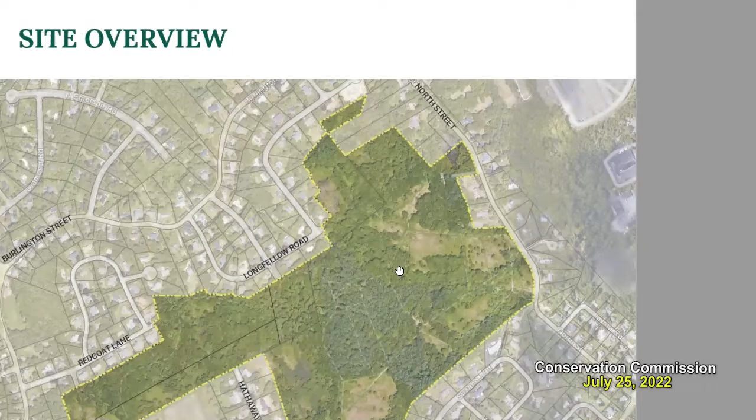So just so everyone knows where we are, Willards Woods is the 107-acre largest conservation area under Lexington's control. We have North Street, the entrance at that location up on the upper right, and then Brent Road at the bottom of the page, and also Hathaway Road, which we'll also be talking about, in the middle bottom left. Just so folks are oriented, that is the site.

To go over the project scope, essentially what Kyle Zick Landscape Architecture has been charged with is coming up with a design plan for a universal access trail or trails, and parking accommodations with that.

So what we've started examining and will continue over the next several months: the proposed trail route or routes we are looking at, infrastructure improvements such as trail improvements in terms of site furnishings, signage, kiosks, and that sort of thing. We'll also be looking at and providing suggestions on invasive species management along the trail route, although not for the entire Willard Woods itself.

We're going to look at sustainability, both in terms of material choice and longevity, but also ease of maintenance. We'll look at parking options for the improved trails, and also develop cost estimates so there can be budgeting and planning moving forward for construction. The project also includes delineating the wetlands along the trail routes we've been looking at, and completing a complete land survey of the entire property, which is ongoing right now and should be wrapping up in the next week or so.

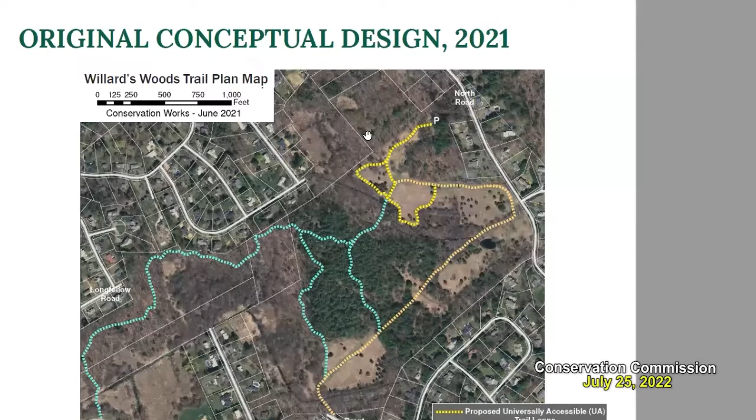Right now we're looking at a number of conceptual designs exploring different lengths of trail and different start and end points. On this map, essentially, we keep the restoration and improved entry drive and parking area at North Street consistent throughout all of them, since we feel that's an important element that should be included in all of the concepts.

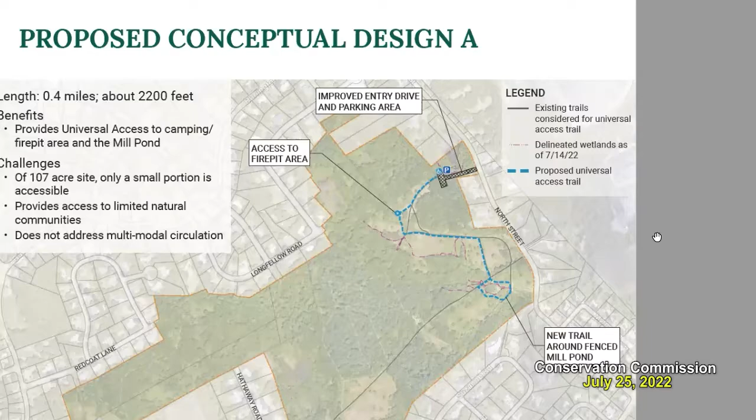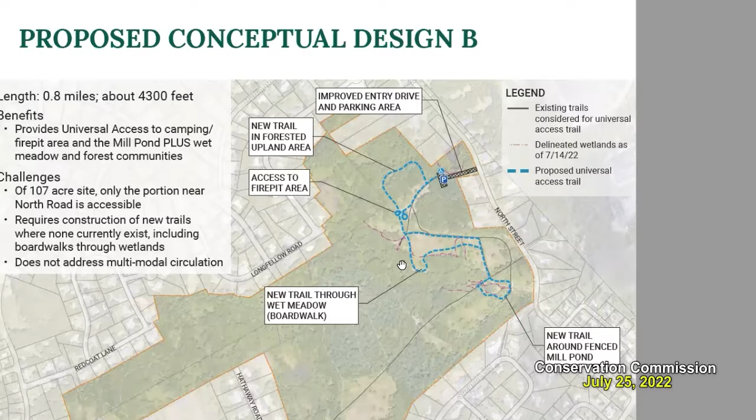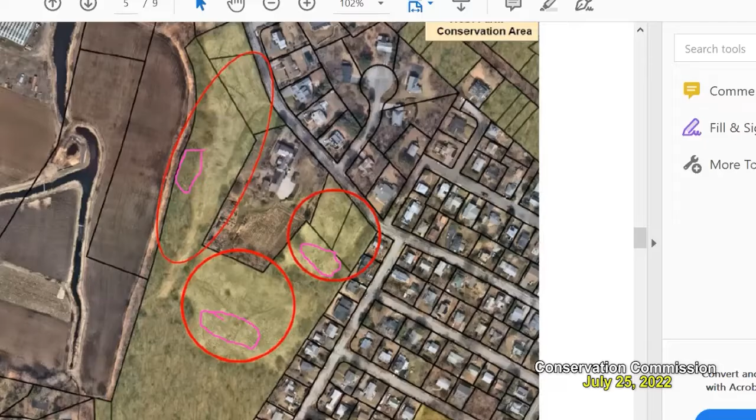Okay, does that give you the direction you need, Amber? Yes, at this time. I can always come back if I have future questions, if management doesn't turn out the way I hoped, but that puts me in the right direction. Thank you.

Now let's move on to the next item, discussion on the draft policy for memorials on conservation land. We get a lot of requests to put in memorial benches, and I found something my predecessor pulled together in 2016. I wanted to revisit that so I can provide more structured guidance on what the commission wants to see. Currently, you've approved various stone benches, no wooden benches, no metal benches. We get a lot of requests lately, about 5 different people asking about a memorial bench at the moment. The select board has an official policy in place that people are familiar with, so they're expecting something similar from the Conservation Commission.

I read through it and didn't have any comments, I thought it looked pretty complete. It gave some specific direction but also gave the commission some flexibility. I was happy with the language. I don't know if the other commissioners had a chance to review it and if they had any comments or concerns.

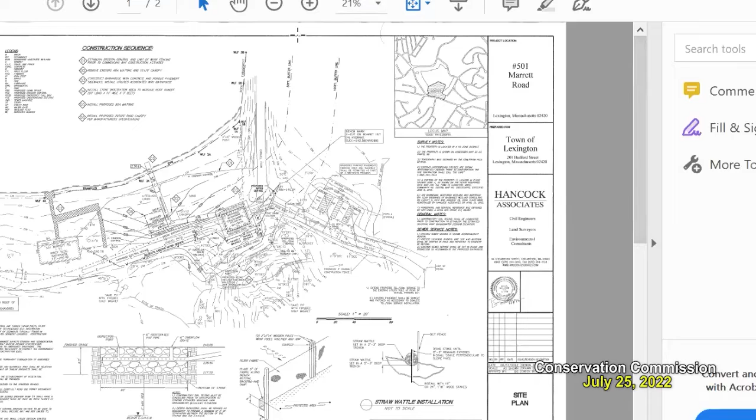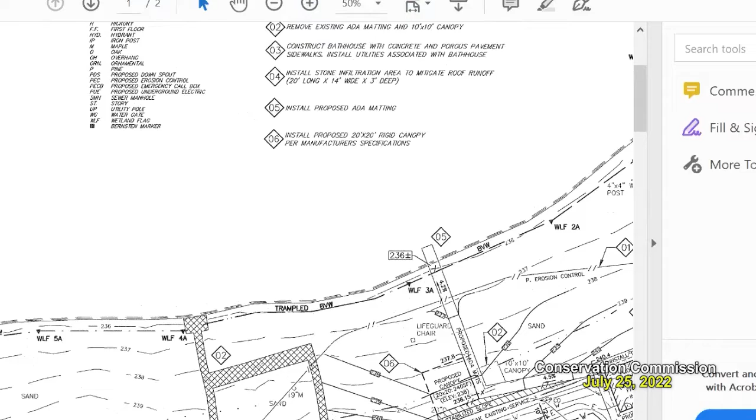Good evening. For the record, Brian Gaudreau with Hancock Associates. I'm here on behalf of the town DPW for the bathhouse improvements at the reservoir. Pretty small scope. What is proposed is a 20 by 26 precast concrete structure to be placed essentially where the gravel driveway is right now, at the fencing line that surrounds the reservoir and the beach.

As part of this bathhouse improvement, there's going to be a new ADA pathway and ADA matting, which is essentially a pervious kind of carpet, to be laid down to the beach and into the water. If you look at the plan, there's a little bit of contouring, limited to regrading the sand heading down to the water to maintain an ADA accessible slope.

There are maximum and minimum slopes we have to adhere to per regulations, and that's what we're showing. There's a small dashed rectangle off to the left of the pathway to the water, and that's going to be a canopy. There's an existing canopy with 4 posts and a canvas cloth. It's going to be substantially similar, just a little bit bigger.

Additionally, there's going to be some utility work outside the fencing line. There's a water line and a sewer line that run from the existing building down towards the school, which will be relocated and connected to the new bathhouse building. Stormwater management has been fully designed to take the roof runoff and the walkway surrounding the building and attenuate and infiltrate it into the ground. There's a small crushed stone infiltration area earmarked southwest of the proposed building.

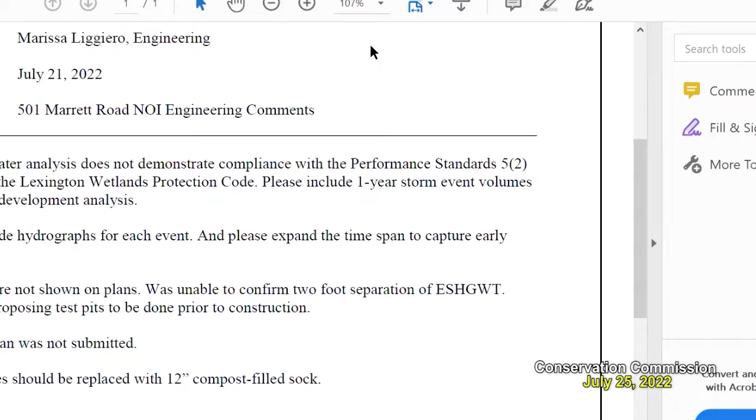There is a geotechnical engineer on board with the project. Borings need to be conducted for part of the foundation engineering before this goes out to bid, and we're anticipating piggybacking on that geotechnical investigation to dig a hole in the ground adjacent to the building, where we're proposing the infiltration structure, to confirm that groundwater elevation. So we'd just look for that to be conditioned. I know it's a small scope project and that was a high-level review, but I'm happy to answer any questions.

Any members of the commission have comments or questions? Jason? Yeah, so I think one question we had at the site visit is how the path is going to wrap around the bathhouse. I guess it would be in the downward direction. I don't know where north is on this figure, but on the bottom of the page, it wraps around the bathhouse. Let me see if I can annotate this real quick. Where the water line is, is that where the path goes?

So the water line is down here, and the fence, if we're talking about the fence, is currently right there. Essentially, the bathhouse sits at the face of the fencing that's there. The walkway that goes around is going to have two gates on either side. So the fence ties into the building in those locations to secure the beach as it is right now.

No, I'm talking about the path to walk around it. So if you're walking around the area, does that path extend that way? Yes, it does.

And so because of that path, is that why we have to take down those trees on that slope? I see two trees to be removed. It's going to be a combination of the pathway and the utilities that are out there. Right now we have sewer, water, and electric that physically go underneath this footprint, and we need to relocate those to the south side of the structure. So it's going to be a combination of the pathway and utility work.

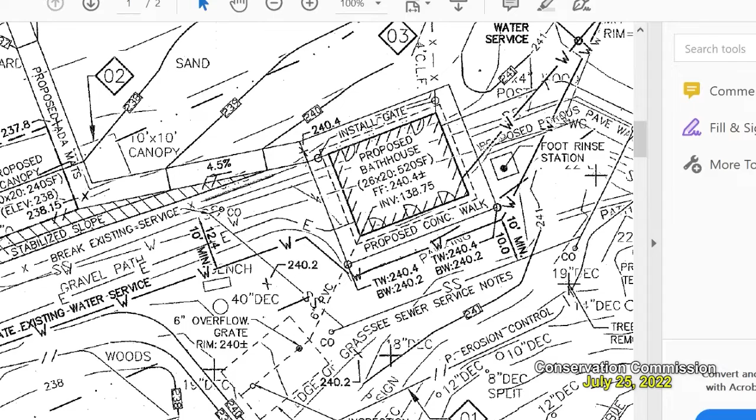Okay. So then with the stormwater system, can we zoom out a little bit? And then pan to the right where the parking, the proposed—not proposed parking, but potential future parking—is shown on the plans.

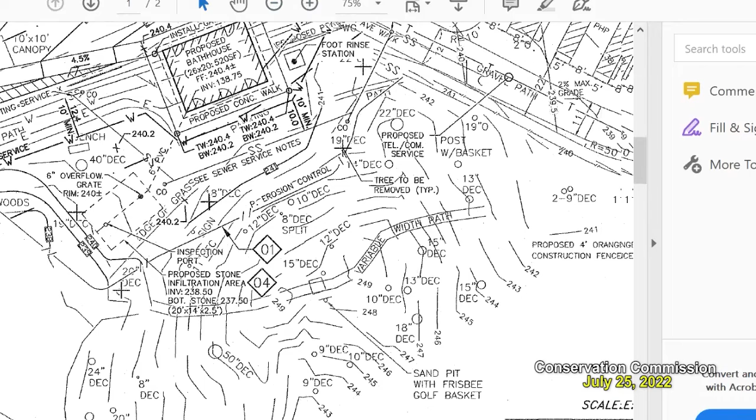Would it be possible to relocate the infiltration chambers to that area where the parking might go in the future? Because then the storm line and all these utility lines, my preference would be for them to stay within this kind of wide pathway corridor. So is it possible to locate it there? It looks like elevation-wise it's pretty comparable to where you have it. Could we locate it over in that area? Because it looks like there's only one small tree that would be disturbed in that area. Is that something you took a look at?

Absolutely. So in revising for what we just talked about, we will certainly look at that as well. Okay.

Then for the water line, I noticed that we've got a new water line to the existing building that's out there. Is that because it needs a new water line, or is that because the proposed bathhouse was going to interrupt that?

So we're not entirely sure what that water line looks like. We have it kind of sketched on there. It's our understanding that we're going to tap into water service at the manhole, then tie into the existing water service wherever we can cut it. So we're showing it happening schematically, but whether it happens next to the existing building or much closer to the proposed bathhouse, we won't know until we dig.

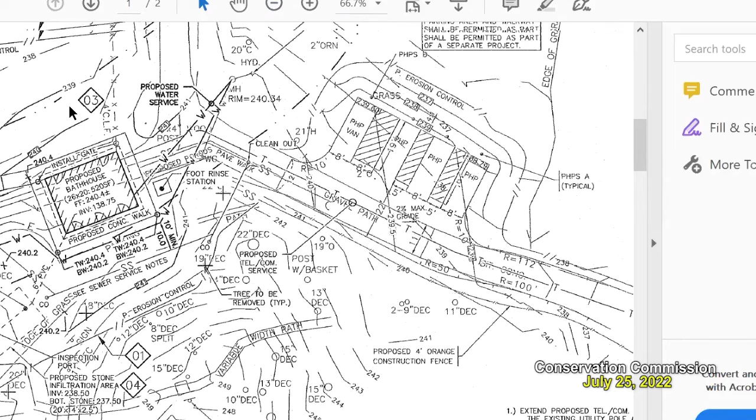I don't know the implications on the accessible route to the beach, but that's something that could be looked at. Yeah, so that's exactly it. If you look at the beach right now, you've got about 5 to 6 feet of topography—elevation change from that gravel path down to the waterway.

So if we take the proposed bathhouse from its current location, which is relatively flat because it's in the graveled area, and shift it to the beach proper, we're now having 3+ feet of elevation from the front of the bathhouse to the back of the bathhouse. So then carrying that grade change down to the water and providing the accessible route, it just didn't work, which is why we took a step back to figure out a more suitable location that still meets the intent and goal of the bathhouse to service beachgoers.

So what I can do to hopefully assuage your concern is take a harder look at those utilities and see if we can't tighten up those limits of disturbance, of trenching, to save as much as possible. And we'll look at the location and how they're running south around the building to see if that is in fact the best fit.

Did you look at a more diagonal alignment for those mats going to the water? Would that get you a longer run? It might need to enter the water more perpendicular to the water line at the very end, but can you work with the existing contours by going diagonally, keeping it under 5, or do it in a way where there's less need to massage those contours? Maybe you even have a path with a handrail next to the bathhouse to drop a foot or so.

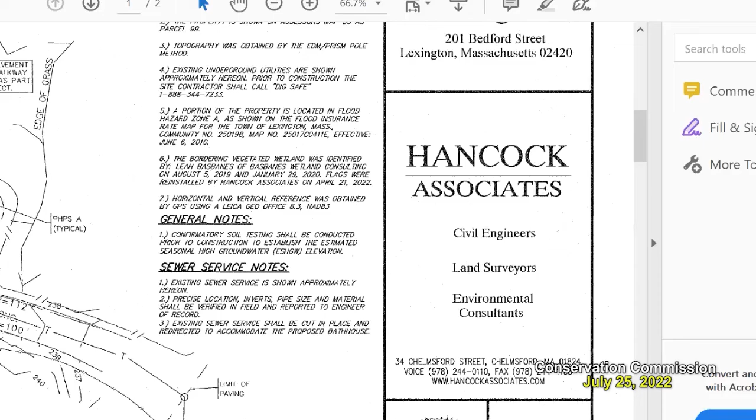That was my question too, just to piggyback on that. So they would come from the school down the gravel path. From the school, they would be okay—bathhouse, yep. There's a physical cart path that goes from the school parking lot up to the reservoir, yep.

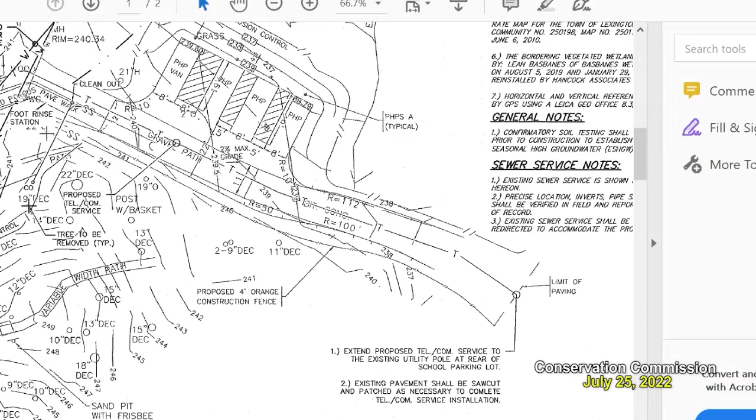Okay, and I'm sorry if I missed this—I was unable to get to the site visit, I was out of town—but is there a plan for an eventual removal of the old bathhouse? It's up in the air.

DPW doesn't know or doesn't have the funding to fully understand what's happening to the existing brick building right now. I believe there were pumps and aerators located in there that they're looking to maintain for the time being.

It's not being proposed to be demolished as a part of this application, but the thought is they're still trying to decide what to do. Okay, thank you.

Mike Cronin, I see your hands up. Good evening, everyone. So let me see if I can help out here a little bit, Kevin. We looked at this for about the last two years, and Marissa's on the call here someplace. It might even be three.

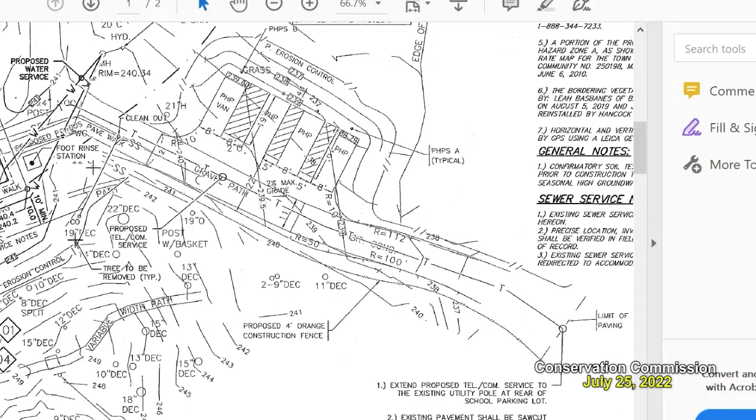So let's go back. We had this whole bathhouse inside the fence in that back corner, and we really wanted it to be there because it made the most sense for it to be inside there. We didn't have to change a whole lot of the fencing or a lot of the pathways. Your argument about relocating that was spot on.

We couldn't do it. We had an accessibility challenge. The building sat up too high on one end and too low on the other, and we couldn't make it an accessible pathway around the building. So we started pushing it back into that corner, and we moved it left, we moved it right. This was the one spot where we did the least amount of damage to all the different components, plus allowed the accessibility piece to happen.

Let me talk a little bit about the tree that you're concerned about inside the fence. We're not touching that tree no matter what. If we have to move that covered structure a little more to the right, closer to the water, we will do that. We're not interested in damaging that tree one bit. On paper it looks like one thing; in the field, we'll locate it accordingly so it doesn't impact the tree. That's not a question—we talked about that the day we were there last week.

I love your idea about potentially moving the system underneath the parking, the new parking spots we're locating on the right side as you enter up from the bridge. That's a great idea. I'm texting right now on the side—I think looking into that solution is a pretty good one. We'll take a look at that as early as tomorrow. I think that's a really good solution. It also eliminates the ability of touching any of those smaller trees down there.

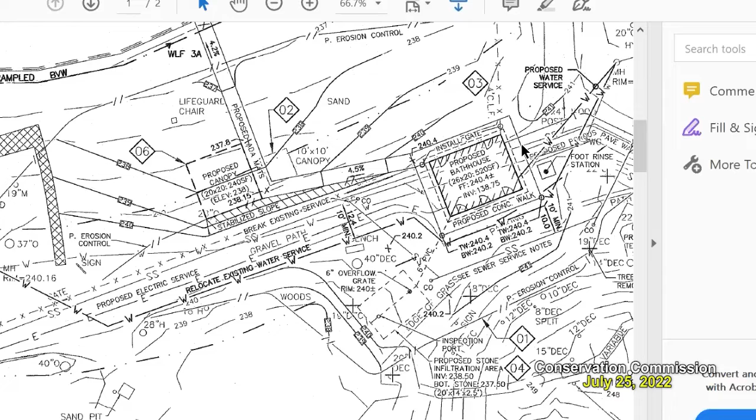Okay, any other comments from the commissioners? Do we have anybody with their hands raised from the public, Karen? No?

Okay, so Mr. Goudreau, I'm assuming you'd like to request a continuance to the next hearing. When is the next hearing? It's August 8th, so you can take a look at the stormwater and maybe some of these other items. Is that your preference? Okay.

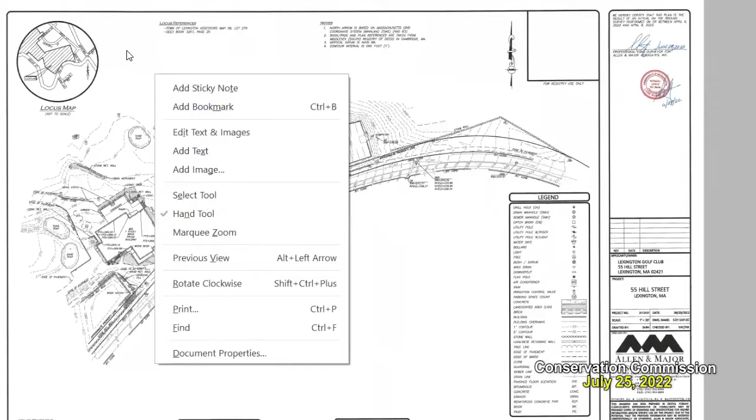So I'll skip past the existing conditions because I was able to display that on the aerial. Essentially what we're doing is, again, they're going to raze the existing golf clubhouse and construct it on the existing foundation, and then add about a 500 square foot addition onto the clubhouse, which will contain a set of stairs and an elevator. As a result, the ADA accessibility parking spots need to conform to the cross slopes.

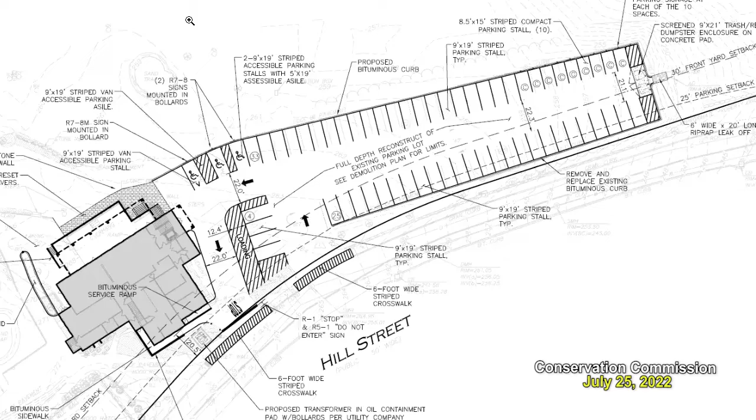So we have to kind of pick up this edge of the parking lot. What we propose to do is full depth reconstruction through the parking lot - it's at the end of its useful life. Then restripe the parking lot back to what's required under the zoning bylaws as far as drive aisle widths and parking stall spacing. We went through the design review, and it was requested that we incorporate a loading area up in front. We're also maintaining the existing curb cuts that are out there today.

Outside of those, that's really the only improvements taking place on the site. Let me scroll down here. So again, these parking spaces need to be regraded. We're going to hold the existing grades of the parking lot as best we can to avoid disturbance. We'll curb the whole thing, put new bituminous curbing around the parking lot.

But we're going to have to incorporate an underground infiltration system. Currently on the existing clubhouse, it's collected by roof leaders, and I've heard varying reports - I've talked to the greenskeeper, I've talked to some old time members, they're not really quite sure where those roof leaders go. I've heard that they are collected and they run out behind, between the first hole and the sixth green.

So we're going to collect all that roof leader as well. The parking lot spills off into a spillway at the end of the parking lot into an area drain. That area drain, in turn, 50 feet away, daylights further down Hill Street, all on golf course property. So what we're proposing to do is capture all the roof drainage - there's about 16 roof leaders coming down off the building, plus an internal roof leader that we'll be capturing. We're going to bring that down to an underground infiltration system.

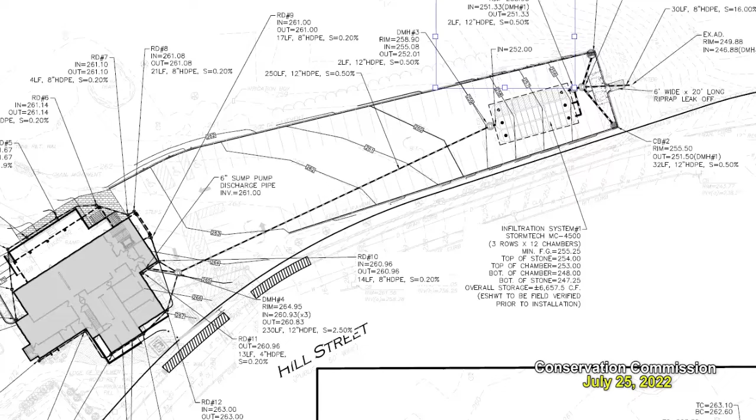As well, with the regrading of the parking lot, we've incorporated 2 catch basins, one at each side. So we'll crown this parking lot and capture the stormwater on each side and bring that back to an underground infiltration system. We've incorporated an overflow structure, so if this system does surcharge, it's going to tie back into that existing area drain that's at the end of the paved area.

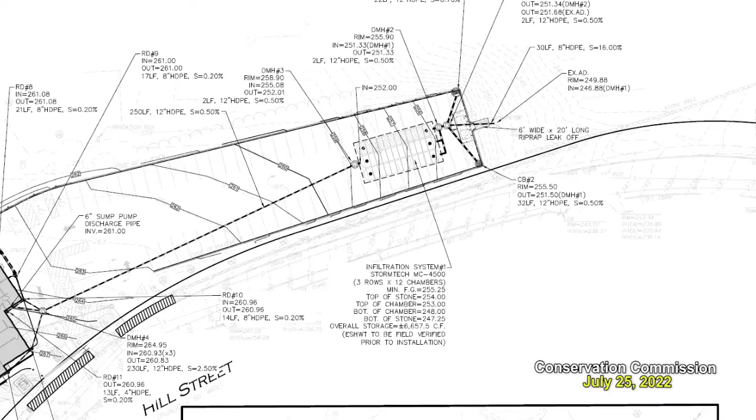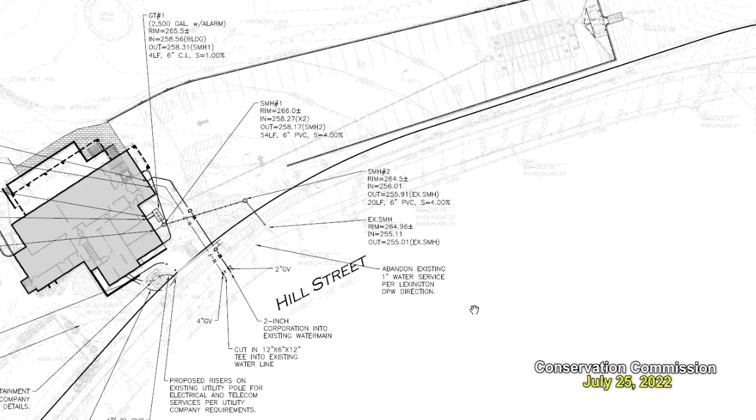With the reconstruction of the clubhouse, we're going to need to add a grease trap. We're going to need to bring new sewer service in, a new water line, a new fire line, and the site's also going to have new electrical service brought in as well.

Again, all that work is going to happen within existing paved surfaces and within existing developed areas. Now, we did do a stormwater report, which was submitted as part of the RDA, and we analyzed where water is actually running off the disturbed areas for this project. We essentially have 3 study points.

There's a small area up in front that runs off to Hill Street. The majority of the existing site runs out into the golf course itself. And then study point number 3 is the area that's captured in the closed drainage system, captured and sheet flows off of the little paved leak off at the end of the driveway.

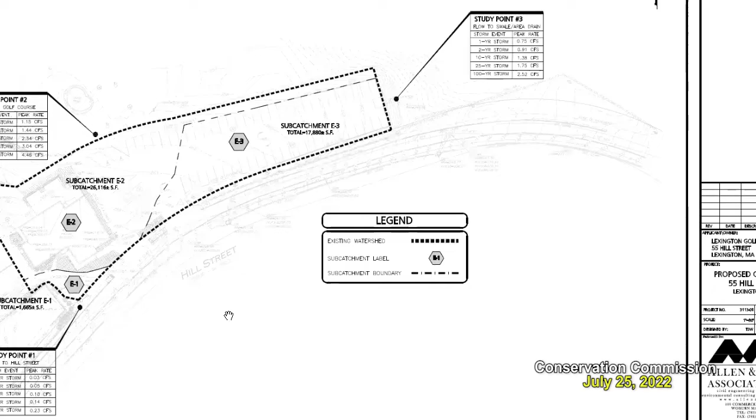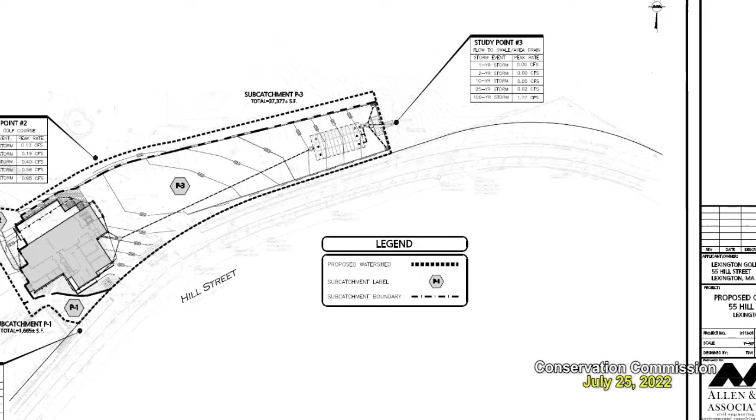In the proposed condition, we looked at the same 3 study points, and we're actually capturing the majority of the stormwater that's generated from the development and putting it back underground. So there's not only a peak reduction in rate of runoff at all 3 study points, but there's a substantial decrease in the volume that's being generated. This is the summary that was essentially in the drainage report.

For study point 1, there's 0 reduction on the sheet flow out to Hill Street because that small little portion that runs out to Hill Street, we're really not touching. Study point 2, what flows off into the golf course under existing conditions, it's the roof leaders, it's portions of the areas in and around the clubhouse itself and a small portion of the parking lot, which we're now going to be capturing.

So the sheet flow that runs off into the golf course is significantly reduced, as well as the volume. Study point 3, which is the big one, is where all the stormwater is going to go from this redevelopment. By incorporating that underground infiltration system, we've reduced the runoff to almost zero, what used to run off the paved leak off into that area drain. Outside of the 100-year storm, we've reduced it to nothing. So we're capturing every storm event and recharging it back into the ground.

So that's really the program in a nutshell. Again, we're outside of any of the wetland resource areas, but it was requested that we file a request for determination with the commission to get your guys' feelings on the project.

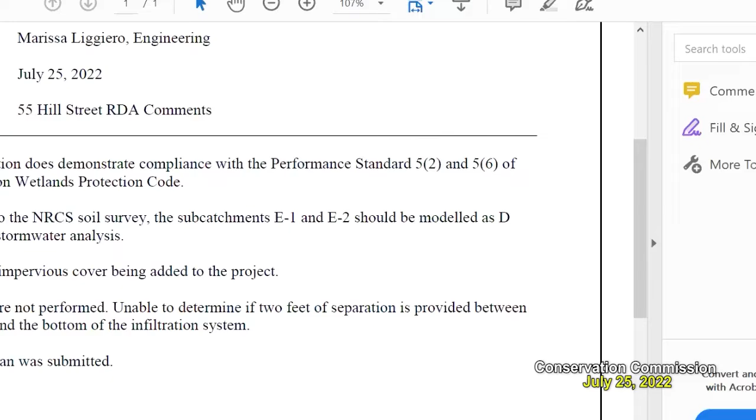Holly, I wasn't able to go out there, but I was curious about how far that spillway off the drive or parking lot is from the resource area. Oh, it's easily 300 feet away. The spillway too, off the back side of that spillway is essentially the fairway to the sixth hole.

Okay, so maybe out of an abundance of caution, I think maybe getting just confirmation from the engineering department that we're fine with the stormwater modeling, but we could make that a condition. So can I get a motion for issuing a negative determination with conditions?

Alex, so moved. Holly, second. Alex, yes. Jason, yes. Holly, yes. Okay, thank you. Move on to the next item in the agenda. I think you have to say yes too, Kevin. Oh, yes, and I vote yes. And I didn't ask if there were any public comments. I'm assuming there are not.

No, okay, great. Next item on the agenda is 22 Village Circle. Property owner Dinesh and Savitha Shantapa. Project is demolition of an existing deck and subsequent reconstruction of a new deck atop an existing concrete slab.

Good evening, my name is Mary Trudeau, and I'm representing the Shantapas this evening. Many of you will recall that there was an order of conditions issued for an addition to this existing single-family house at 22 Village Circle, probably about a year ago. And the work, as you probably noticed when you were at your site visit, is ongoing.

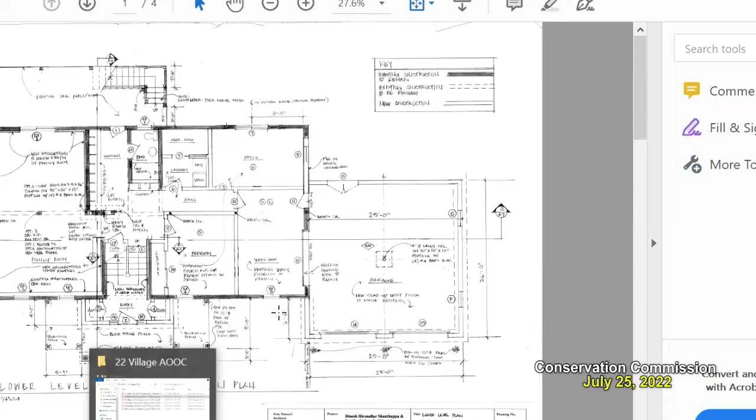The deck has been designed to incorporate helical supports, which allow for minimal disturbance of the ground and would require minor saw cutting into the existing concrete pad to allow for contact with the actual substrate beneath it. There would be no additional impervious surface on the site. Arguably there might be less, because for each of the helical supports we would require an 18-inch by 18-inch cut, and the supports are approximately 6 inches by 6 inches, so there would be a small amount of area that would technically be permeable as a result of this work, but it's truly insignificant.

The erosion controls are currently in place on this site and would not need to be relocated for the work on the deck to proceed. They consist of a 12-inch Filtrexx tube, and they were in very good condition the last time I saw them several weeks ago. If there are questions from the commission, I would be happy to answer them.

Thanks, Mary. So you said that the cuts in that concrete slab will be 18 inches by 18 inches, and then after the helical piles go in, they'll be backfilled with stone or some sort of permeable material? I would assume that it would be washed stone. Washed stone would be what you would put into that.

Okay, so I did not see that. I mean that all sounds fine to me. We can see what the other commissioners think, but maybe I'm jumping the gun here—I didn't see anything that specifically talked about the size of the cuts in the slab or what would go back. So if we were to condition it as you described, 18 inches square with washed stone, would that be acceptable to you? Yes, I believe the dimension is given in my text, but not shown on the plan. Okay, that would be enough, perfectly amenable to that. Okay, thank you.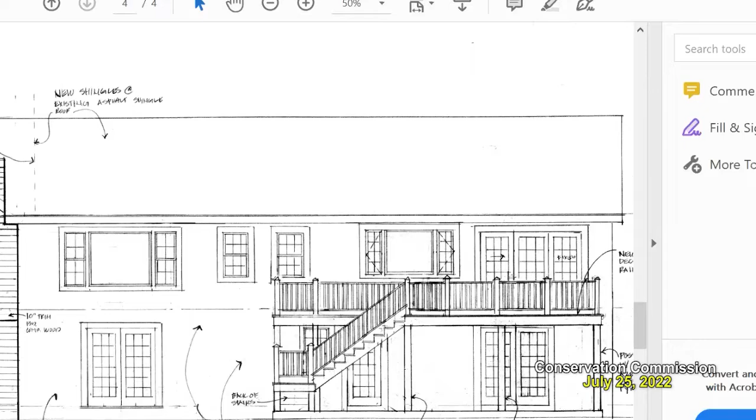Any comments or questions from the commissioners? Nope, okay. Can I get a motion to approve the amendment as described? Oh, yep, Karen. In this case you just have to close the hearing. Okay, just close the hearing. All right, and I assume there are no comments either. Does anybody have their hand raised in the audience?

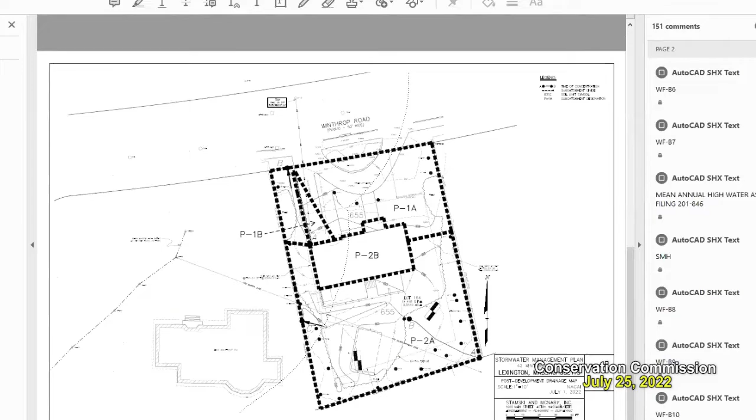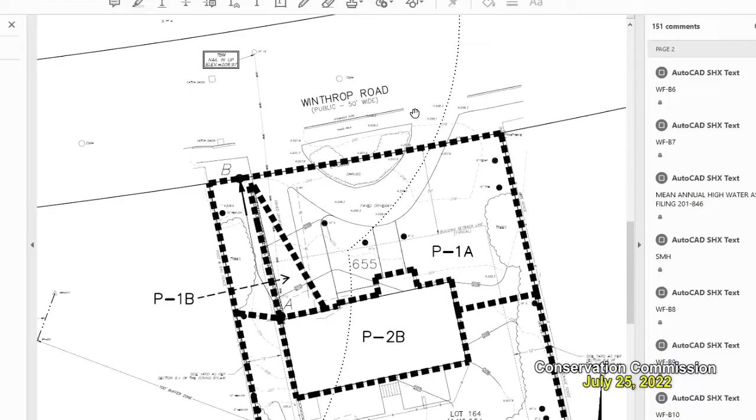There was also a little bit of confusion about what exactly is draining. There's an infiltration trench along the driveway to mitigate the increased driveway area in the front, so the entire driveway is not being captured. It's not intended that way, because the grades mean this portion of the driveway is what's being captured and infiltrated in that trench, and this area itself is greater than the increase in impervious surface from the driveway expansion. So in this particular subcatchment draining towards Winthrop Road, we are mitigating all of the storms, and the post-development runoff rate and volume are less than the existing runoff rate and volume.

I'll go back to the plan and continue on. It was also brought up by both Karen and engineering whether or not the patio is impervious or pervious. It is proposed to be impervious, and that area was included in the post-development calculations as impervious surface.

So that has been accommodated in those calculations. Engineering didn't have an issue with this, but I think Karen's looking for a little more information. There is an overflow on the dry well, but it's only overflowing in the 100-year storm, so all other storms are completely mitigated and maintained on site. This is discharging a small amount of volume during a 100-year storm to a level spreader, which disperses the overflow volume so it's not a concentrated flow. Calculations for that were provided in the stormwater report and reviewed by engineering, and they didn't have a comment on that.

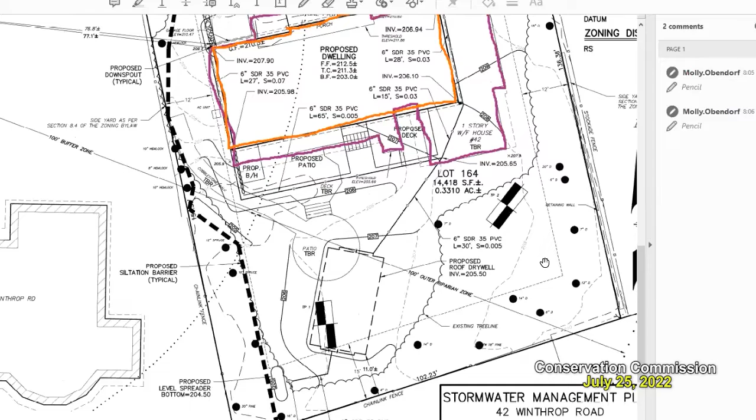And then there were a few more comments about demarcating the limit of work. It is a bit unclear here. We do have erosion controls on the side of the resource area, which I realize I forgot to mention. It's the mean annual high water line on the adjacent property at 44 Winthrop, and the property is fully within the 200-foot riverfront area, which is why we are before the commission tonight. So the limit of work will be demarcated by both the filter mitt as well as orange construction fencing upgradient, where we don't need to worry about siltation and erosion control.

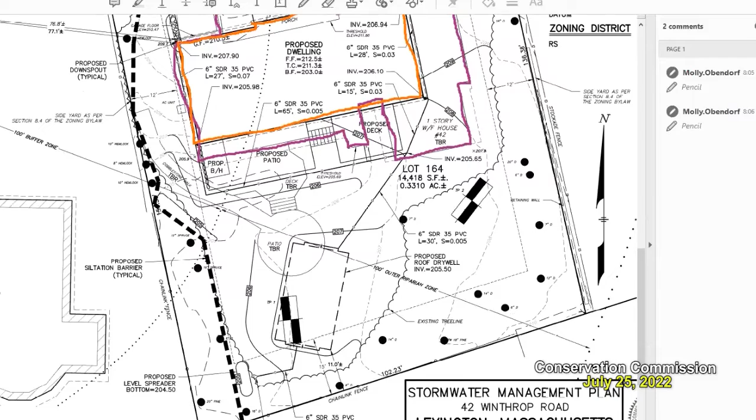And then demarcating—we're showing all the existing trees here and their sizes. It doesn't look like the type of tree was determined, so I can see if we can get that information. The only trees being removed are 3 trees in front: a 10-inch, a 12-inch, and an 8-inch diameter tree proposed to be removed in front, shown as such on the plan, but I will make that more clear with an X on those trees being removed.

I believe that covers both Karen's and engineering's comments that we did receive. So I am happy to answer any questions the commission has at this time regarding the project.

Thank you, Ms. Obendorf. Do any of the commissioners have comments or questions? Holly?

Yeah, we noticed significant populations of some invasive plants on this property. I don't know if this is within our jurisdiction to request some management of Japanese knotweed particularly, and I don't remember what else was there. But I think it would be to the homeowner's benefit if those populations were removed.

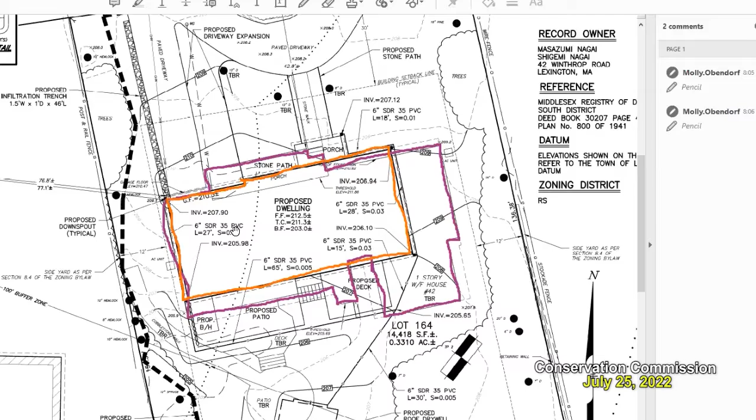So can I get a motion to continue the hearing to the August 8th meeting at the applicant's request? Mrs. Holly, so moved. Alex, second. Alex, yes. Jason, yes. Holly, yes, and I vote yes.

Great, thank you guys for your time. Thank you. Okay.

Next on our list is a request for determination of applicability for 26 Bedford Street. The applicant is Jiazhen Liu, and the project is to raise the height of the roof of a two-family dwelling within the 100-foot buffer zone to bordering vegetated wetlands.

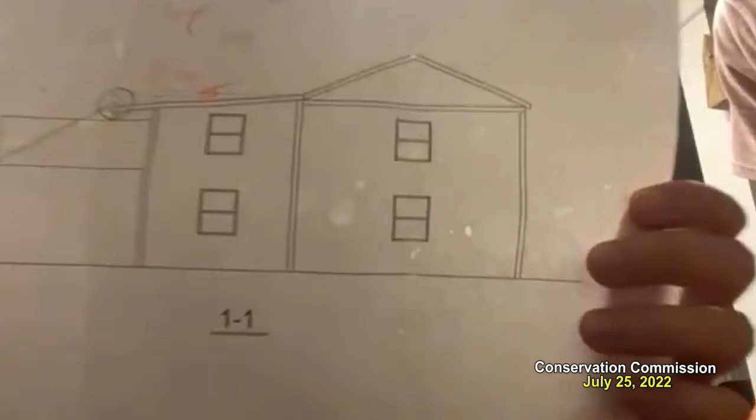If my son speaks more English than me, he speaks to me - is that okay? Okay, that sounds good. Just real briefly, could you identify yourself for the record please? I am Henry Liu, son of Jiazhen Liu. Great, thank you very much.

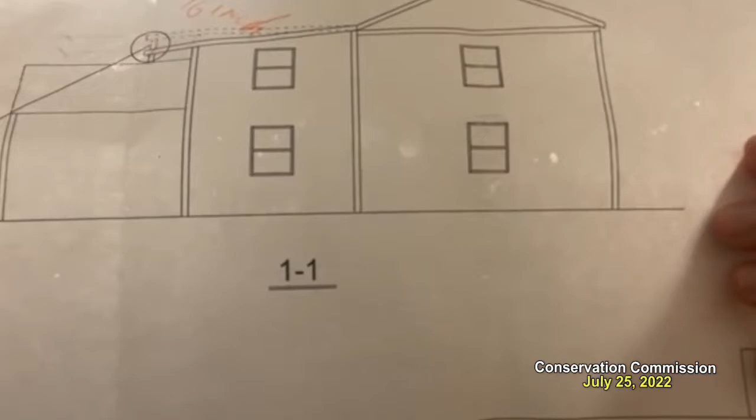So we want to raise the back roof of our house. It's uneven - towards the left side it's leading down. So we want to remove the roof and raise it by 16 inches. That's the only change; we're not going to build anything else, it's just raising the roof.

Okay. And then do we have a plan for this, Karen? Hold on, I was just trying to pull it up. We don't have a good plan, but there is a picture. Okay, so this roof area, if you recall.

Is this the kind of thing where it's important to identify a limit of work, or is that less of a concern? Sorry, I wasn't able to go out on the site visit, but based on it, we definitely need a limit of work and erosion controls. You can see there's some previous staining from concrete that was poured to fix a footing that was not properly controlled.

So Karen, are you comfortable if we make that a condition that they work with staff at a pre-construction meeting to identify that limit of work and any erosion control measures that are needed? Sure. And then I know during the site visit, there was just some discussion about the site, existing site conditions and some operations that were taking place on the site, so I didn't know if the commission had any thoughts on that.

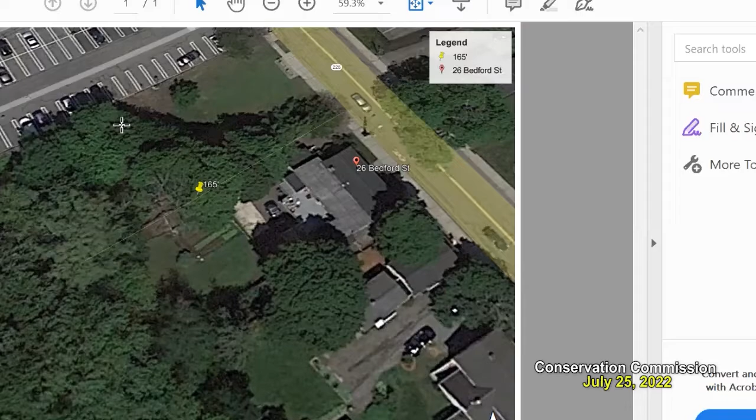Any other comments from the commissioners? Any hands raised? No? Okay, can I get a motion for a negative determination with conditions as discussed?

Jason, so moved. Mrs. Holly, second. Thank you. Alex, yes. Jason, yes. Holly, yes. And I vote yes. Thank you, thank you very much, Mr. Liu, thank you.

And they should understand that a negative determination means that it's okay to go ahead with the work. Negative is good in this case. Okay, thank you.

Okay, now we're going into the continued public meetings and hearings. So the next item on our agenda is a notice of intent for 20 Woodpark Circle. Applicant is Anil Padana and Kachana Bhatt. The project is to raise and rebuild a single-family dwelling within the 100-foot buffer zone to bordering vegetated wetlands.

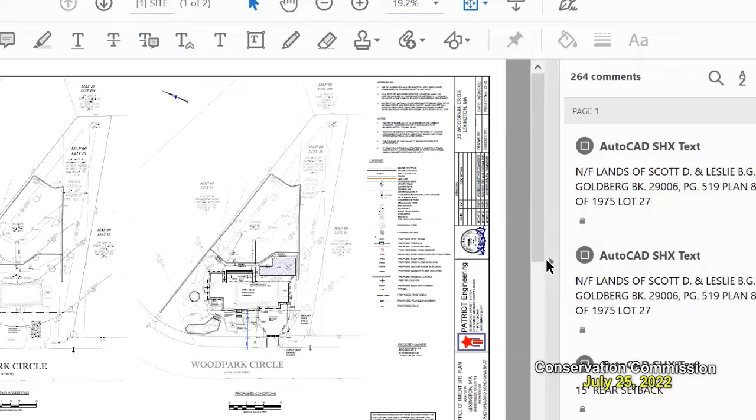Good evening, commission members, Rich Kirby from LEC Environmental here. I think the commission probably remembers this project at this point, this is our third public hearing. At the last public hearing, the commission was contemplating whether or not they might condition some plan changes, and we said nope, we'll request a continuance just to make sure all of the changes are on the plan. And so that's what we've done.

Since the last hearing, Mike Novak, project engineer from Patriot Engineering, modified the plan in a couple of ways. The first way is the retaining wall off the back of the house, specifically the section behind the proposed patio. We moved that back toward the patio by a couple of feet, so now the distance between the tree and the patio is 8.3 feet. We were a couple feet closer last time.

So we pulled that retaining wall back. We also added a detail on the second sheet of the retaining wall, the block style wall. And we added a note to this plan indicating that a certified arborist would be involved if any tree roots greater than 2 inches had to be removed.

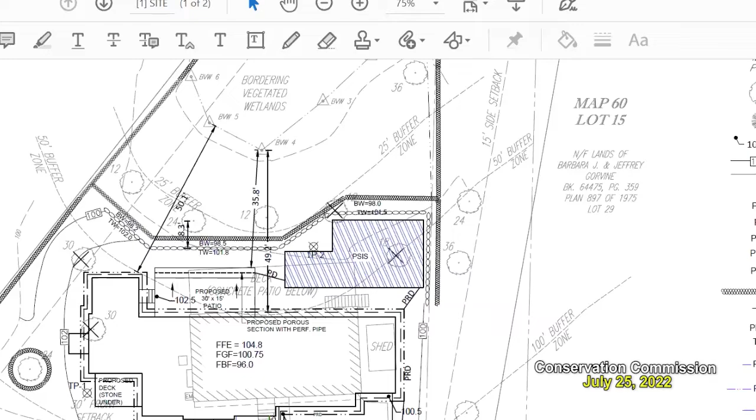The second thing that we did is revise the planting plan. Since the retaining wall shifted back, we were able to modify the restoration planting plan to make sure that it extends all the way to the retaining wall. We also added the FENO conservation markers at the base of the wall, and we modified the planting scheme such that the gray dogwood that had been proposed within the wetland is now within the buffer zone, and replaced with other wetland plants.

And of course, I reviewed the fact that these planting plans are generally schematic in nature, and once all the plants are delivered, we use the plan as a guide but actually site the plants where we think they'll actually do their best. So I think that covers all of the changes that we made, but happy to answer any questions that the commission may have.

Thank you, Mr. Kirby. Any comments or questions from the commission? Alex?

I just quickly want to say thank you for taking the time to work through this. Sure, no, we realized it was an aggressive project, frankly, but the homeowners really wanted to stay in the neighborhood and stay on their property. So instead of going to look for something else, they're looking to raise and rebuild in place. So I'm glad it worked out.

It is a unique property with a unique set of circumstances, but I think with the mitigation effort proposed and the stormwater management, we have an improvement compared to what's out there now.

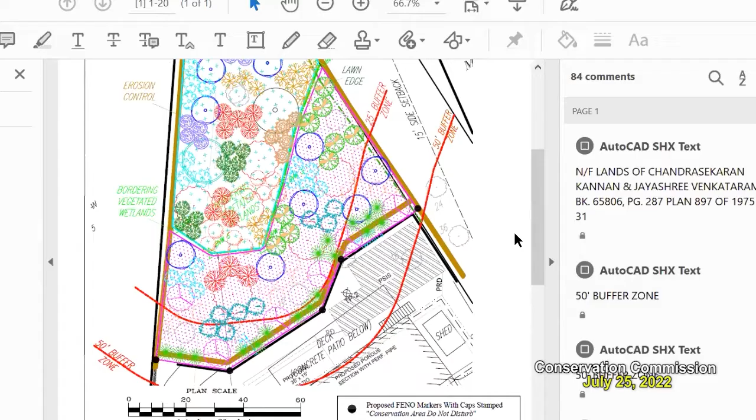Holly, did you have your hand up? No, I was just going to say the same thing. I'm happy with the improvements. Thank you, okay. I'll second or third that.

Can I get a motion to close the hearing? Alex, so moved. Jason, second. Alex, yes. Jason, yes. Holly, yes. And I vote yes. Thank you, Mr. Kirby. All right, thanks everybody.

Have a great night. You too.

Okay, the last item on our agenda for meetings and hearings is 48 Allen Street, notice of intent. The applicant has requested a continuance to the August 8th meeting. Can I get a motion for that? Jason, so moved. Alex, second. Alex, yes. Jason, yes. Holly, yes. And I vote yes.

Okay, let's go back to new business, pending matters. I think the next thing on our agenda are plan modifications and insignificant plan changes. First is 17 Augustus Road. Karen, could you please speak to that?

Yes, they've actually asked for a continuance to August 8th. They're working through the setback issues through zoning. So do we need to vote on that continuance? No, it'll just be back at the next meeting, okay.